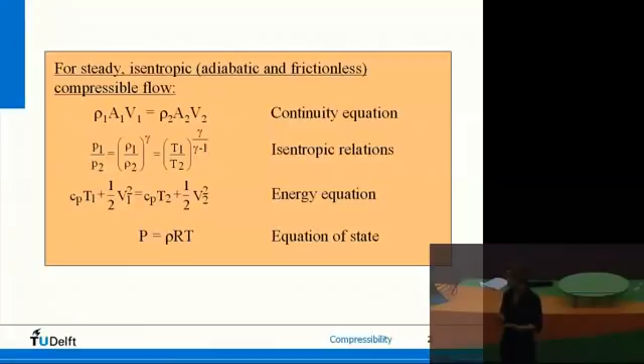Actually, if your flow is fast, supersonic or transonic, you have pressure and density changes such that the temperature does change in your flow. Through P equals rho RT, it can expand very much, so the density can drop a lot, and then something will happen to the temperature as well.

So please bear in mind, isentropic flow means that no heat is added or subtracted, but the temperature can still change. And the other thing is that it should be reversible so that dissipative effects can be neglected.

And then we derived these equations. We already had conservation of mass, the continuity equation. Then last time I derived the isentropic relations, and these are strong relations relating the scalar quantities, pressure, density, and temperature ratios to each other.

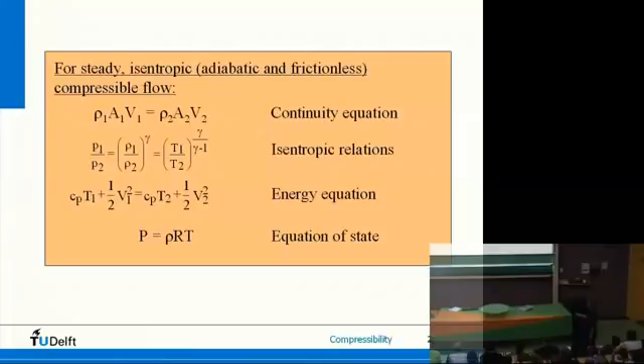So once you have knowledge about the state at point 1, and you know one other quantity at another location, point 2, you can derive the rest. These are the isentropic flow relations.

Then for isentropic flow as well, we could derive the energy equation, starting from the first law of thermodynamics and using the Euler equation. This is sort of the equivalent of Bernoulli. Here you see that velocities scale with enthalpy, so changes in velocity squared scale with Cp times T, which is enthalpy. This is conserved throughout the streamline, so Cp*T plus a half V squared is constant.

That's the energy conservation. We already had introduced in the first lecture the equation of state, P equals rho RT. So we have here the unknowns P, rho, T, and V — four unknowns and four equations. So if you know, for example, the areas, you can solve for anything from these. And that was where we ended up.

Last lecture, I was halfway through this exam problem from last year. It's a compressible flow problem. If you look at the old exams, typically for the aerodynamics part we have usually one question on incompressible flows, CL, CDs, and one question on compressible flows. I won't promise anything, but it will be quite a significant part because it's quite important for aircraft aerodynamics. It will be an important part of the exam.

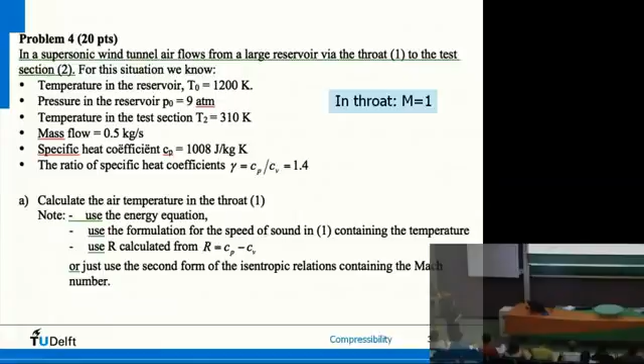So the exam question we asked last year concerned a supersonic wind tunnel blowing from a large reservoir into a converging nozzle. Reservoir conditions were given: temperature in the reservoir, pressure in the reservoir. Then the temperature in the test section was given, the mass flow, the specific heat coefficient, and the ratio of specific heats.

Then we finished part A, so we calculated the air temperature in the throat, and this is a picture of the case. We have a very large reservoir here, and flow is going out into the throat. I got a question, how can the speed be 0 in this large reservoir? Well, you can assume it to be really huge and the outlet to be very small. Some bit of the reservoir will have flow going out, but the very large bulk doesn't really notice it, so you can approximately assume the speed to be 0 inside the large reservoir.

It's going through the throat, a converging nozzle, then diverging into a test section. Now, if the conditions are such that you get really supersonic flow, and it was said it is a supersonic wind tunnel — that depends among other things on this contraction ratio, but also on the pressure behind it. Please note that the pressure in the reservoir was 9 atmospheres, so it's really pushed out.

If it's supersonic, then at the smallest cross-section, called the throat, we will have the Mach number equal to 1. The Mach number is speed divided by the speed of sound, so here the flow will exactly have the speed of sound. That has to do with something we will explain next year in compressible aerodynamics.

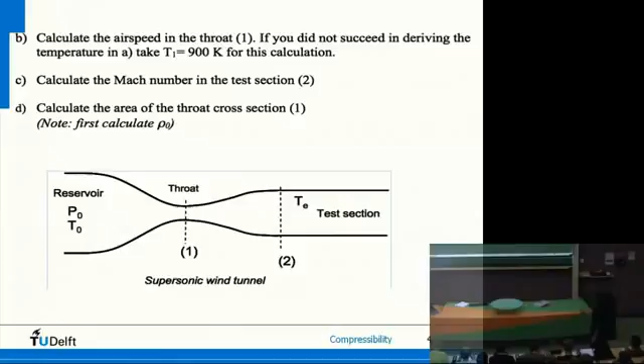So Mach is 1 here, sonic flow, and if it's a supersonic wind tunnel, if you increase the area, the flow speed will increase, and you will have supersonic flow at the test section. We're halfway, I think. We just calculated the airspeed, and I think we're now at point C. So I will give the answers we derived last time.

So the temperature in the test, what was it? In the throat, I think. What was the first question? Yeah, temperature in the throat. So, A: T star was 1000 Kelvin.

And B, the speed in the throat, actually equal to the speed of sound in the throat by definition, was equal to 640 meters per second.

Now let's continue with question C. And the question there is, calculate the Mach number in the test section. Mach number, any ideas how we can do that?

Yes. So step 1, what is the Mach number? Speed divided by the speed of sound. So Mach number in the test section is V test over A test.

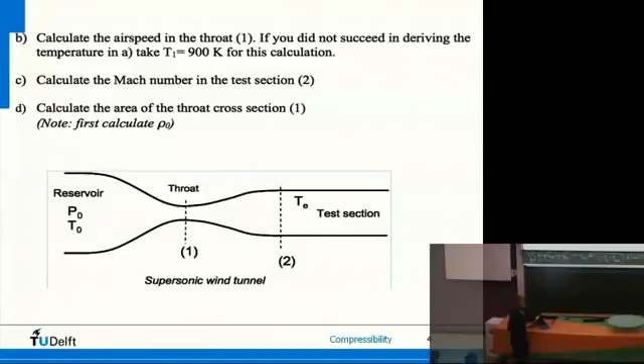The area of the throat of the cross section. Any ideas? Rho AV, we can use that one. And what is it equal to? Mass flow, perfect. So indeed, rho AV is constant. Good point, because this is the only equation we have the area in, so good starting point.

So this is constant, and what is it equal to? It's equal to the mass flow. You can check it: we have rho, kilograms per meters cubed, area in meters squared, V, speed in meters per second. So what is the dimension of this? It's kilograms per second. So how much kilograms of air go through this area per second?

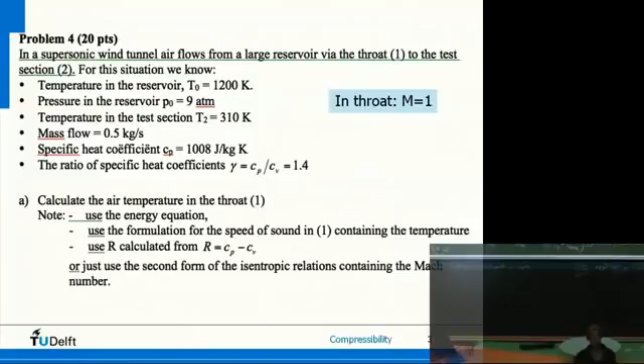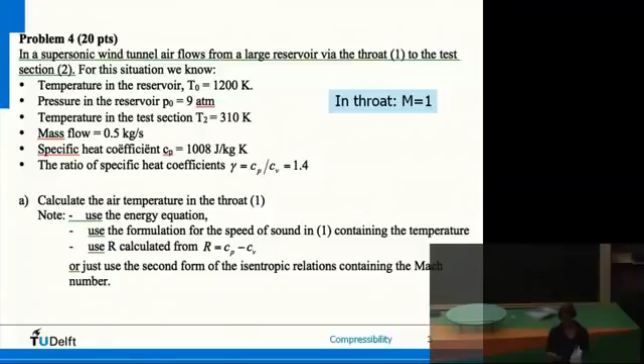Right, so it's the mass flow. Do we have information about the mass flow? 0.5. So indeed, we can solve this question now, because we have 0.5. Where do we have 0.5? Everywhere, it's constant. Okay, area of the throat in the cross-section, well then, of course, this one is given.

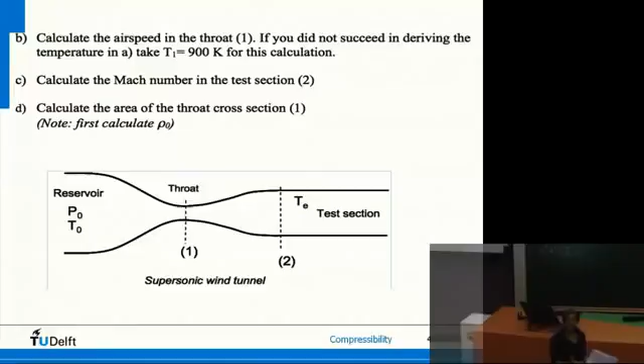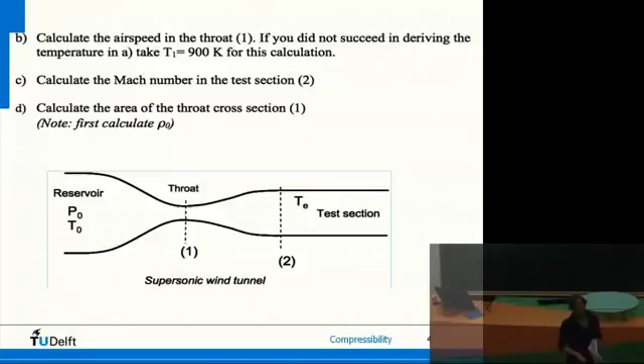Speed is 0? Whoa, wait a minute. So we have to apply this in the throat, right, to find the area of the throat. Then somebody said speed is 0 - wait a minute, I'll get back to that. So yes, you might get the idea that the speed is 0, because in the reservoir the speed is 0, we just assumed. So if you apply it there, we have no mass flow. What is happening there? Well, we have an infinite area in a way, so infinite times 0, what is it? It depends a bit on how it goes to 0. So that is not something that brings you much further.

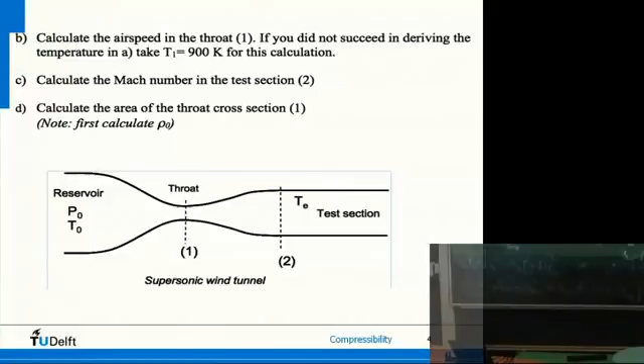So mass flow equals rho star, A star, V star. We're looking for A star, so that's going to be the area of the throat. It is then mass flow divided by density in the throat times speed in the throat. Do we have the density in the throat, and do we have the speed in the throat? Speed, yes, right, I think we computed it here. So that one we have from B. So V star from B, V star was 640 meters per second. So if there's any way to compute rho star, we're done.

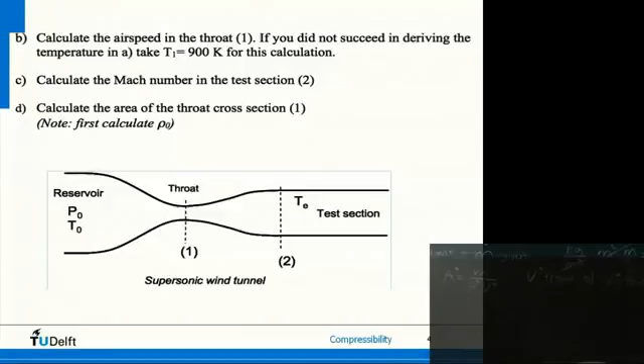Isentropic relations, perfect, because isentropic relations relate ratios of something to ratios. What would you apply it to? So of course on one side density, right? So the isentropic relations for density, rho 1 over rho 2 is equal to, and what would we choose, which form, pressures or temperatures? Temperatures, perfect, because we have more information on temperatures actually. So T1 over T2 to the power 1 over gamma minus 1.

Now we have to choose point 1 and point 2. So where are we going to take it from? This is the general form of the isentropic flow relations. We're looking for something in the throat, so it probably makes sense to choose one of them in the throat, right? So let's do this one in the throat. And the other one? 0, yes, reservoir.

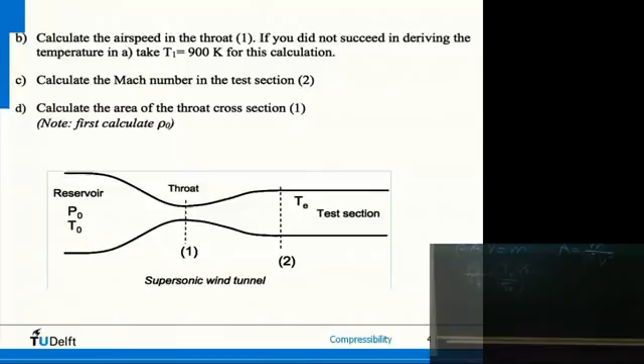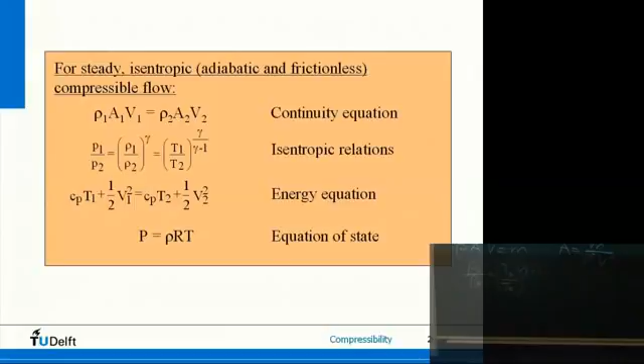Why do we choose the other one in the reservoir? No, this is fine, no, the gamma is with the pressures. Sorry, rho, I made a step. So rho 1 over rho 2 to the power gamma. So the isentropic relations: rho 1 over rho 2 to the power gamma is equal to T1 over T2 to the power gamma over gamma minus 1. What I did is I took the gamma square root of this. If I had taken the pressure, of course it's true, but I'm looking for density versus temperature.

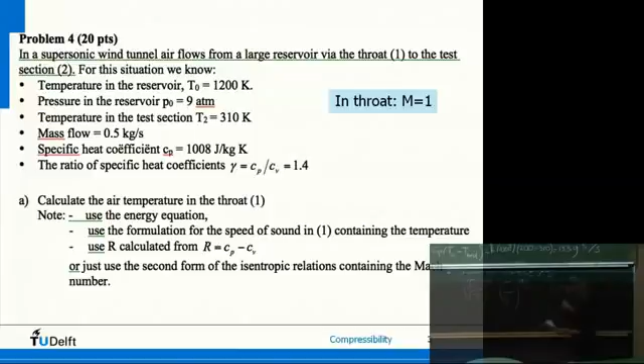Okay, why reservoir? We have also temperatures in the throat, right? We need pressure, because for rho 0, it's not enough to have temperatures. We use the equation of state, and we need pressure, and that's the only location that we know of pressure. Indeed, so rho 0 from the equation of state: P0 over R T0. So let's do that first. Then rho 0 is equal to the pressure, 9 atmosphere, so 9 times 1.01 times 10 to the power 5, divided by R, 288, times temperature in the reservoir, 1200. So then we find the density in the reservoir to be 2.64 kilograms per meters cubed.

So we know this one, rho 0, we know that one, and we know that one. Okay, so now it's just working our way through the equations. This means that rho star is equal to rho 0 divided by T0 over T star to the power 1 over gamma minus 1.

That's not so interesting, so rho star is rho 0, which we just computed, 2.64 divided by T0, which was given as 1200. T star we computed at some point, right? Yeah, 1000 Kelvin. So this is from A.

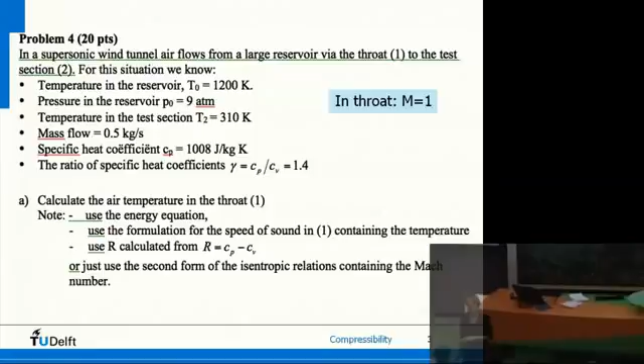Okay, compressible flows. A little bit more of compressible flows, and then we're going to look at measurement of flows, because that's quite important in our wind tunnels, but also when you're in your aircraft you would like to know the speed of your aircraft, and we do that in a certain way. So the rest of the lecture will first be a bit more compressible flows. I'll derive the second form of isentropic relations, but also how to measure flows. First, I'll clean the blackboard. That's section 4.9 to 4.14 of Anderson.

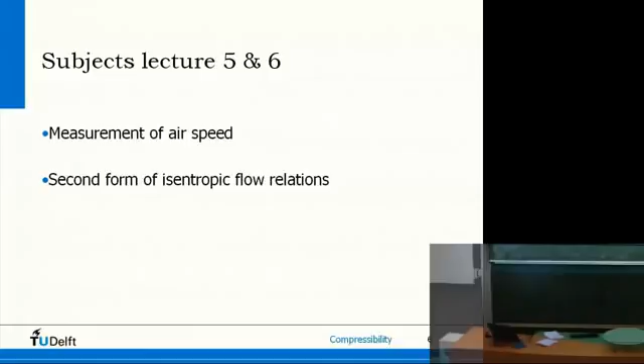So, measurement of airspeed and the second form of isentropic flow relations. Of course, compressible flows, unfortunately it's not flying anymore, but it's relevant for supersonic flows, like the supersonic aircraft Concorde.

Just summarizing from last time, also please don't forget about the speed of sound. That's the speed at which sound waves travel, A squared equals dp over d rho. Using the Euler equations and conservation of mass, we could derive that this is the same as A equals square root of gamma p over rho. Using the equation of state, we found A equals square root of gamma RT.

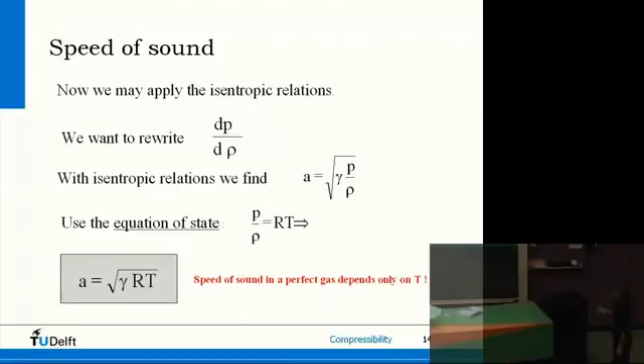So the speed of sound, which travels through a medium, is only related to the temperature. That's due to the fact that temperature is actually the kinetic energy of the molecules, and sound is transmitted through molecules throughout the medium. This is, of course, only in a perfect gas, because we use the equation of state in a perfect gas. Then the Mach number, V over A, we already worked with it.

Speed over speed of sound. If Mach number is smaller than 1, the speed is smaller than the speed of sound, and we call the flow subsonic. We actually have a name also for low speed subsonic: when the speed is so low you can assume incompressible flow, below 100 meters per second. But of course we also have high speed subsonic, above 100 meters per second, and this 100 meters per second is approximately Mach 0.3. So the low speed subsonic incompressible flow assumption applies when Mach is below 0.3.

But when Mach is between 0.3 and 1, you do have relevant density changes already, but the flow speed is still below the speed of sound, subsonic. Then when Mach is 1, they're exactly equal: sonic, what you have inside the throat of a supersonic nozzle, a wind tunnel, or also can be a rocket engine. If it's around one, we also have a certain name, that's called transonic.

So it says in some parts of the flow it's below 1, in some parts of the flow it's above 1, but it's actually around 1, and that is what most commercial airlines are flying at. So for transonic flow, if you have an aircraft at cruise speed, you typically have a speed of about Mach 0.7 to 0.8, and then the flow will increase over the wing, and you will have locally supersonic flows on certain portions of the wing.

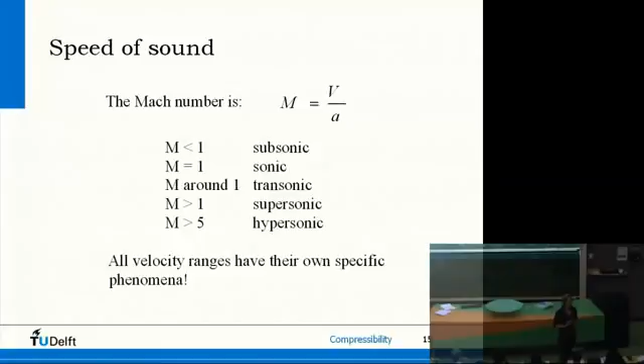Okay, now let's go back to the low speed range, the subsonic low speed, and look at how we can determine airspeeds, because that's what we're often very interested in—speeds of aircraft, airspeeds in our wind tunnel. So how do we go about that?

Suppose again a wind tunnel, but now a subsonic nozzle. So we have a converging-diverging nozzle again, a test section here, certain conditions upstream, certain conditions downstream, and certain total conditions in the reservoir way up here. What is then the value of this airspeed here in the wind tunnel section? So I have an example with that.

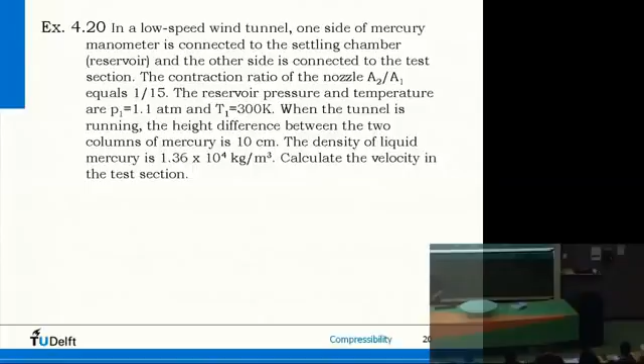That's example 4.20. So in a low-speed wind tunnel, we put a manometer, a mercury manometer, and connect it to the settling chamber, the reservoir, on one side, and the test section on the other side. The contraction ratio of the nozzle is given as 1/15, that's the area ratio. The reservoir pressure and temperature are given, and the height difference of mercury is given, where one side was connected to the settling chamber and the other side was connected to the test section. The density of the mercury is given. So the question: calculate the velocity in the test section.

So question 1 is, what does a manometer do? I hope you'll remember from high school, but if not, I'll repeat it. So let's first start with a manometer, which is a way to measure pressures.

A manometer is a U-like tube. We connect the sides through tubes to certain locations in the wind tunnel—one is the settling chamber and the other side is the test section.

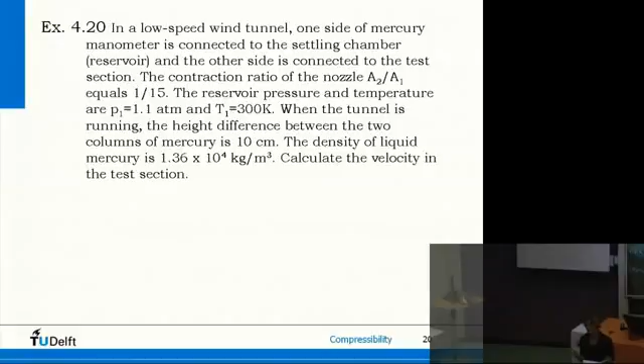Equation of state, perfectly. The pressure difference - if you think about the isentropic flow relations, P over P and T over T, that's really for compressible flow, where you have significant temperature changes. In incompressible flow, you typically don't have them. So the one I used before for the supersonic wind tunnel won't get you anywhere. But the equation of state, P equals rho RT - if we know somewhere pressure and temperature, we can find the density.

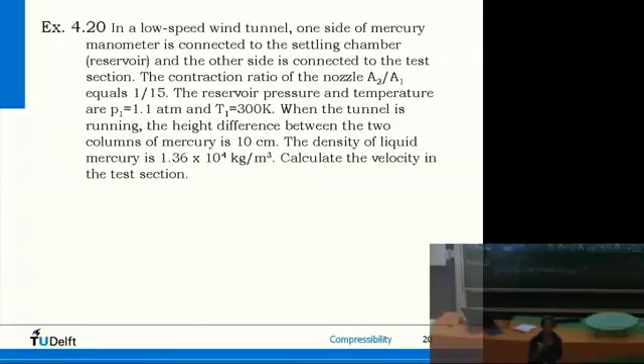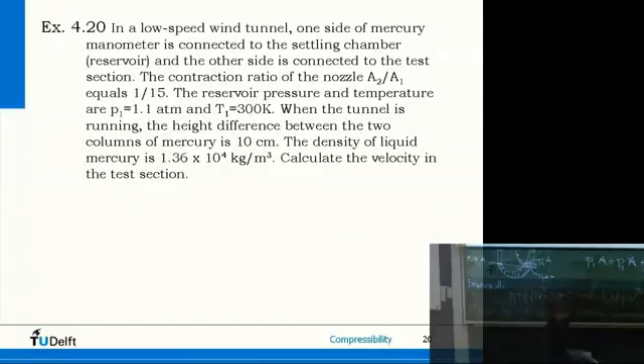Do we have somewhere pressure and temperature? Reservoir, or well, settling chamber, it's called here. Yeah, so rho from equation of state, that's the settling chamber. Okay, so rho we know. P1, PT, P2 we know through the manometer. So then we still have one equation with two unknowns, V1 and V2.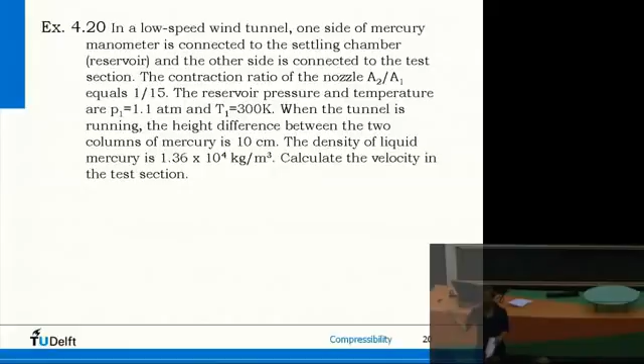So really, we have here a cross-section and here a cross-section. So we have a certain pressure here and a certain pressure here. And what you will see, we didn't compute it yet, but this pressure difference is not in the order of 9 atmospheres. It's much smaller in incompressible flow - small pressure differences scaling with velocity differences. So we still have a V1 and we have a V2. We're looking for V2 here, but we have still two unknowns, so we need more information.

Question: what didn't we use? Yeah, V1A1, mass conservation. We have it actually here - so if you're stuck, read the question again. Is there something given I didn't use? Yes, the contraction ratio. So conservation of mass, the continuity equation. And we have incompressible flow, so we have V1A1 is V2A2.

So we can substitute this into the equation. We're looking for V2, so we can substitute V1 is V2A2 over A1, right? So we can substitute that into this.

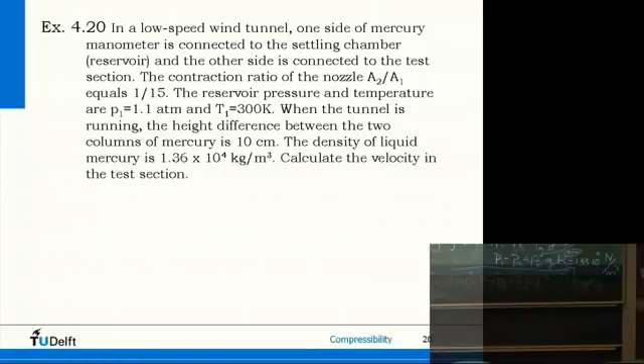So then we have the 1.33 times 10 to the power 4, that's the pressure difference, times 2, divided by the density - we didn't compute the density yet. So let's do the density from the equation of state: rho is P over RT. Pressure is given as 1.1 atmosphere, 1.1 times 10 to the power 5, R is 287, and the temperature is 300. So the density then is, where is it, here: 1.29 kilograms per meter cubed.

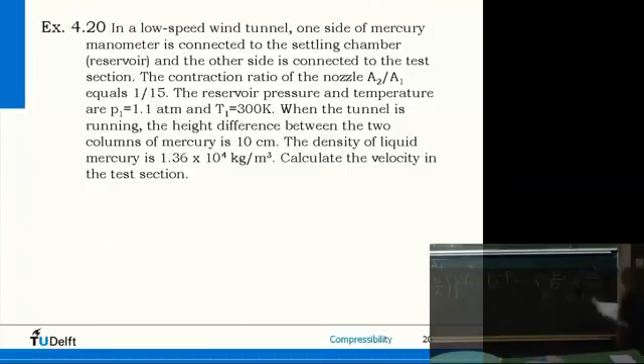And please don't mix up density - this is of course the density of the air going through. We use a different density in the manometer, that of mercury. So 1.29 for the density, 1 minus the contraction ratio, that was given as 1 over 15 squared, square root, and the end result...

144 meters per second. Somebody says, woo, compressible, yeah. So this is a bit of a nasty example. I won't do this in the exam because you cannot actually solve it - we didn't give you the information for the compressible flow - but it's good that you're aware, because I will show you later what difference it makes, quite often.

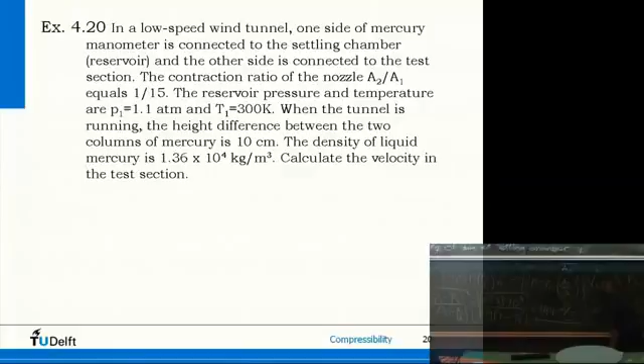But this - so the speed is above 100 meters per second, I should have used compressible flow. Later we'll look into the differences. It's not a very drastic difference - from the second form of the isentropic flow relations I'm going to derive later, you'll see it's not a strong difference, so it might change 7 or 8%. But I'll do that after.

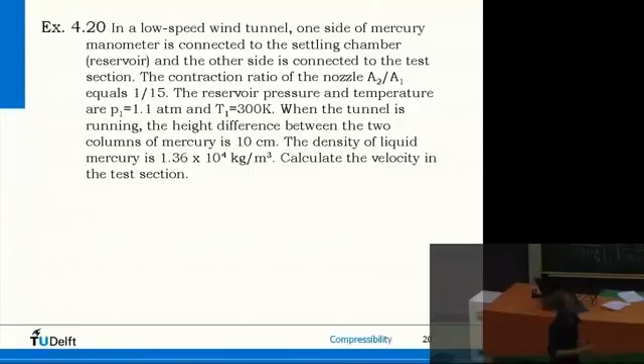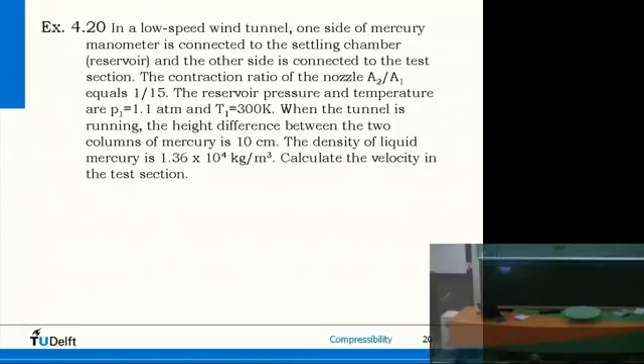I put the manometer on, right? And it's P1 minus P2, with a height. How did I know which one was the low pressure and which one was the high pressure? I think I said P1 minus P2 - or did I say P2 minus P1? P1 minus P2. So here was rho g h. Could I have said P2 minus P1? No, because you have to realize which one is the low pressure and which one is the high pressure - the one with incompressible flow, the one with the largest area, right?

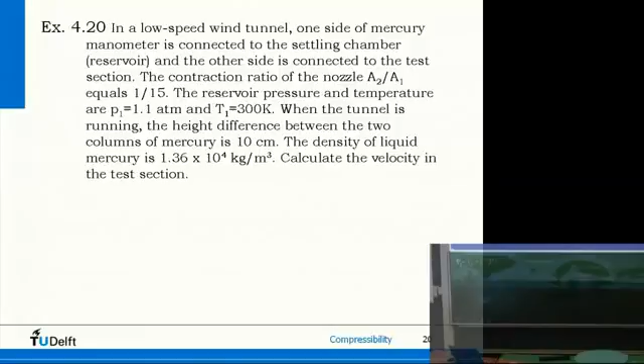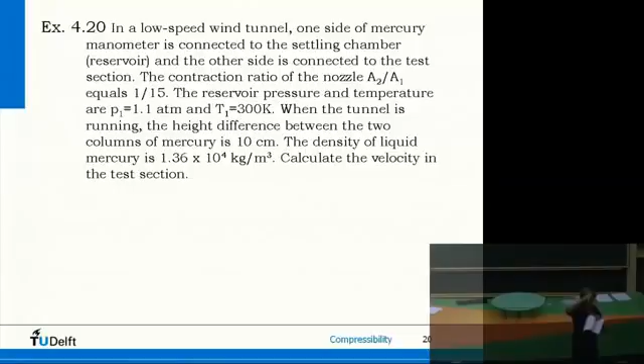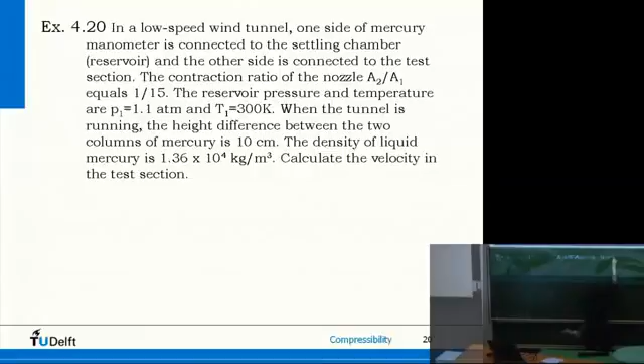So I use this: A2 over A1 is 1 over 15, so area 1 is 15 times larger than area 2. So area 1 is the large area, area 2 is the small area. So area 1, large area, low speed, and in incompressible flow, as we decrease the area, the speed increases, right? So area 1, large area, so what I used is A1 is 15 times A2, so V1 smaller than V2, and then in Bernoulli, P1 plus half rho V1 squared equals P2 plus half rho V2 squared. So if V2 is much larger than V1, P2 is much smaller than P1, right?

I drew this one, right? P1, P2.

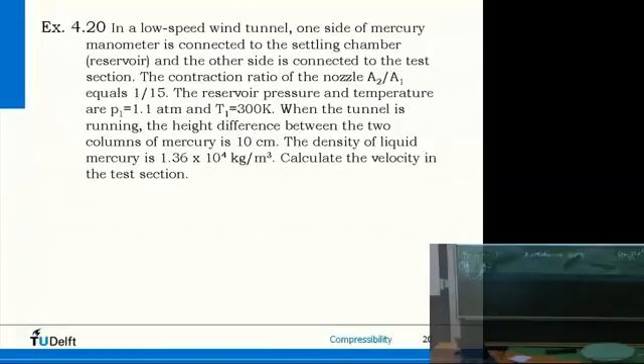So which one is the high pressure? P1 is the high pressure in this case, and P2 the low pressure. No, sorry, that's wrong, I'm confusing you. Well, whatever, sorry. But be aware that you get P1 and P2 correct. What you could also have done with the pressures is substitute them separately - compute P1 and P2 and substitute them into the Bernoulli equation. That's more confusing, sorry. Okay, then speeds. But at least you should be aware which one has a higher speed and which has a higher pressure and lower pressure.

Of course, the notation is a bit confusing. I introduced speed as a vector with a direction. Here, I always do a one-dimensional balance, so my velocities have just one direction, typically horizontal. I don't assume changes across the cross-section, so I have a cross-section and assume unidirectional, uniform flow. Viscous effects are not important, and that is my speed. So it's not really a vector because I use scalars - I really only use the x direction.

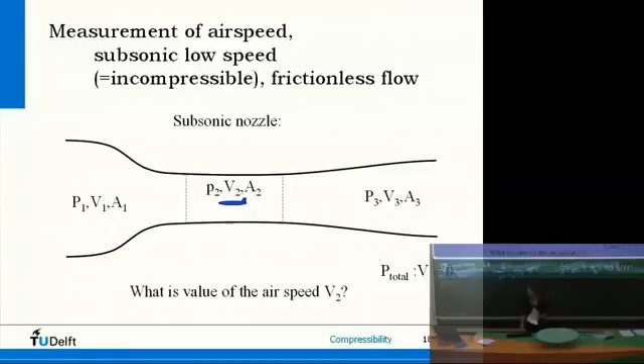Then I ask you a homework - I gave you homework which you can now maybe solve. So given this example, homework 4.4, please have a look at it. It was also a converging-diverging nozzle with V in and a pressure given. A contraction ratio is given there, and P1 minus P2 is given here. It's in Anglo-Saxon units - you can transform it to SI units if you want, but it's more about the way you think. So I don't mind what the answer is, but think about whether you can solve this. The question is to find V2 given only this. Some people were not able to solve it, but you can solve it a similar way as this example, so please try that at home. Okay.

Then we go to equivalent airspeed, and I'll introduce that to you based on another example. How is airspeed usually measured on an aircraft? Using pitot tubes and pitot static tubes. Here we have some information: an altimeter says the aircraft is flying at 1500 meters, we have an outside temperature of 277 Kelvin. If a pitot tube mounted on the wingtip measures a certain pressure, what is the true velocity of the airspeed, and what is the equivalent velocity of the airspeed? Now I'll introduce those concepts.

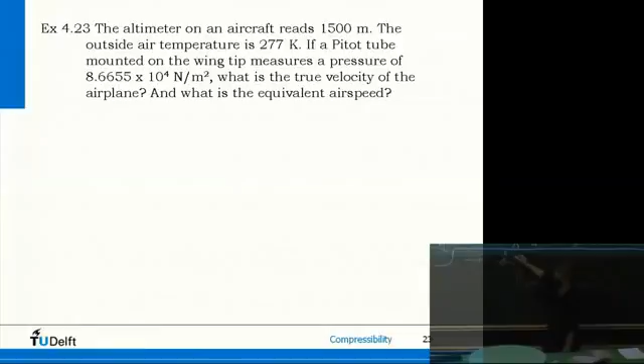So first the pitot tube - that's a way to measure. We had the manometer measuring pressure differences; the pitot tube also measures pressures. The pitot tube is like this: you have the flow, this is actually a very small tube. Flow flows into the tube and you have here a pressure gauge, sort of reservoir, where the speed is collected. So the speed goes in, and then the tube fills itself with air. So what is the pressure that you measure here? Stagnation pressure, indeed, because it fills itself and then it doesn't flow through. So actually, if you put this tube into the flow, the pitot tube measures the stagnation pressure, or total pressure, there where the speed is zero.

We also have pitot static tubes, connecting this one to another with typically a manometer. So suppose you have a channel - you connect this, again, a differential pressure gauge, to this tube. In this way you can measure differences: here you measure total pressure, and here static pressure. Why does it measure static pressure here? Well, this tube doesn't fill up - the flow goes just past it, and inside the pitot tube the pressure is felt locally at that point. So you have the static pressure and the total pressure, and here a differential pressure gauge that measures the difference. So you have information on P0 minus P static at that location.

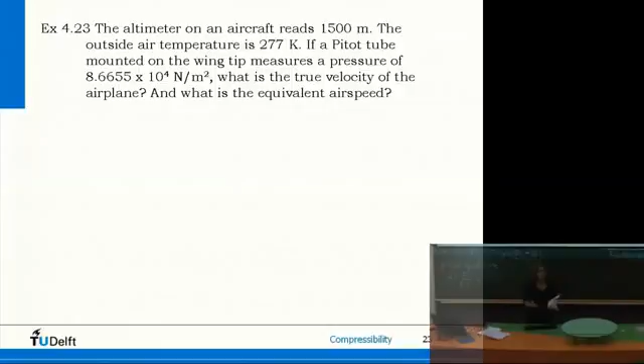So then, what pressure do we use, right? The strange thing is that the density we assume constant, the pressure changes a bit, so apparently the temperature also changes a bit, but we don't have information on how the temperature changes that bit, right? So what do we do? We have information on pressures at free stream conditions, so we use the temperature at free stream conditions. So we need the free stream pressure, P, at 1500 meters, at free stream conditions.

8.456 times 10 to the power 4, divided by R 287, temperature given 277. So then we find the density to be 1.064 kilograms per meter cubed.

So now we can compute the velocity, square root of 2 times P0 minus P over rho. So V is 2 times P0, the pitot tube value given up there, 8.6655, minus this one, 8.456 times 10 to the power 4, divided by the density, 1.064, square root. And then we find the speed to be 62.8 meters per second. Is that okay?

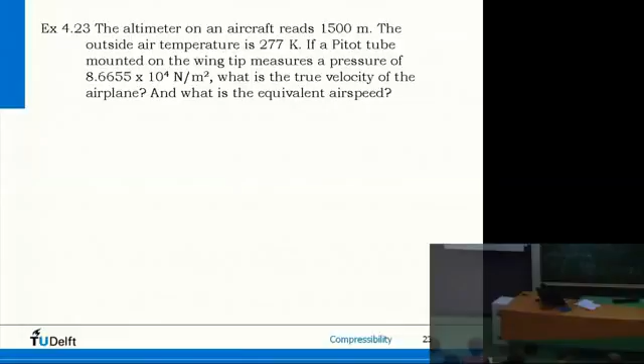The pitot tube just measures the static pressure or the difference between them both? No, so question of the definitions, good point. Pitot tube always measures total pressure. So pitot tube is this one, total pressure. This is the pitot-static tube, so this one is called pitot/static tube. So the pitot tube measures total pressure.

Now the equivalent airspeed, so we just computed the true airspeed. Equivalent airspeed is, if people are lazy, they sometimes use it in aircraft and use not the actual density from the temperature measurement, but the density at standard sea level conditions, so 1.225. So it's an approximation. Now how far off are we? So we could have computed the equivalent airspeed.

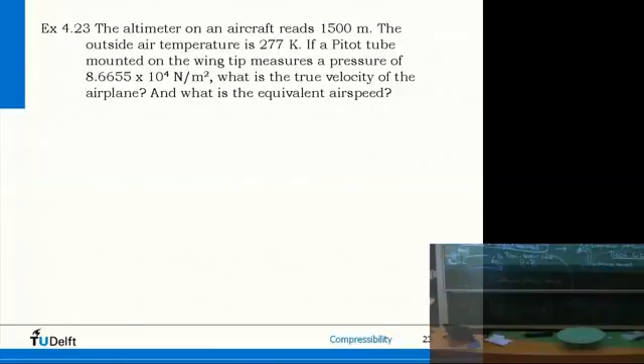So that's equivalent airspeed. Questions? No, then we can continue with our compressible flow stuff.

Yes, question, sorry. Why do we actually use equivalent airspeed? Yeah, because it's in the Anderson book and it is a good concept. I don't think you use it that much. The question was, why do you use equivalent airspeed? Well, it's hard to measure densities, but you can derive densities from temperature. So if you have an actual temperature measurement, it's not a problem like this. But sometimes people don't have it, and then they use it as an approximation. But especially close to stall, I wouldn't recommend it.

Okay. Yes, isentropic flow relations. So bear with me for the last quarter of an hour.

Okay, so what are we going to do?

We have the compressible flow equations: the energy equation relating temperatures and speeds, and isentropic flow relations relating density ratios to pressure ratios and temperature ratios. But sometimes it's easier to work with things like the Mach number, so you can recombine these equations into a different form. They're not more information, just in a different form, which might be handy if you have information about Mach numbers. So instead of temperatures, velocities, pressure ratios and density ratios, we'll combine them so that if I have information on a temperature ratio and a Mach number, I can directly relate ratios to Mach numbers. So that's what we're going to do, recombine the energy equation and the isentropic relations.

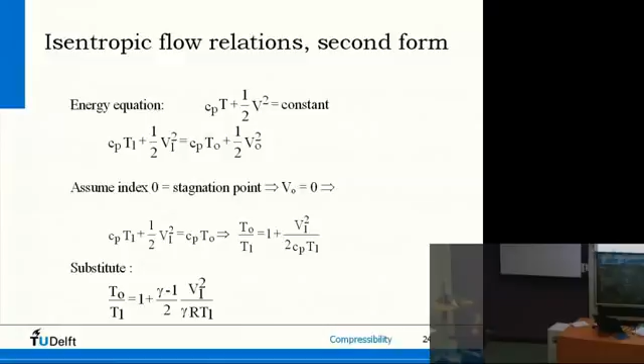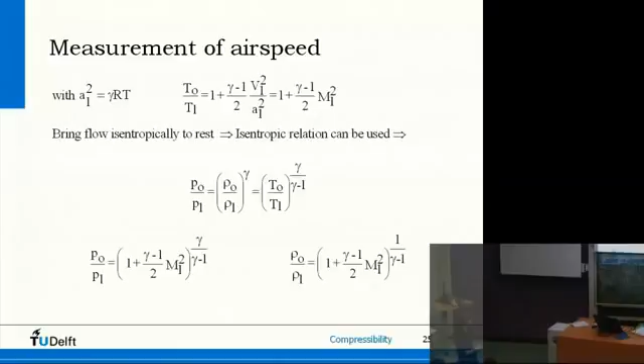So then we have these and these from the isentropic flow relations. I think I have a summary slide. Yes, it's the same - it's gray, so it means that you really have to remember it. On the exam, we might ask you to derive these from the energy equation and the isentropic flow. The only a bit tedious step - it's actually quite straightforward, I think.

The only tedious step is these specific constants reworking I did on the blackboard. But if you remember that you have to start from the energy H is E plus PV, and you have to work your way to find a relation for Cp as a function of R, I think you should be fine. Should be - if you practice lots.

Okay. I hope we have time for one practice. No? Oh, sorry. Okay, now what am I going to do first?

So I told you, you had to believe me, that we can assume incompressible flow for low speeds. You believe me? Good, I've been convincing. You can check now, right? So here you have a relation of how much the density changes with respect to total conditions as a function of the Mach number, and it goes squared.

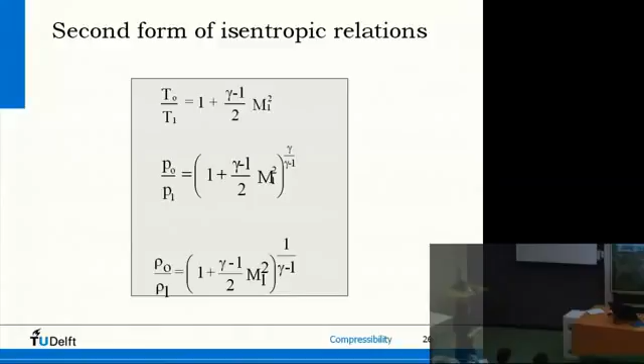So you can imagine squared, that is a parabola, right? So close to 0, it will not change that much. I will have the plot on the next slide. Close to 0, it will not change much, but further away, for higher Mach numbers not close to 0, you have a stronger density change. So from this equation, I can directly show you what this density change actually is.

Here I have the density ratio, so now I have to put it the other way around: rho over rho0, so it is going down. So when the density becomes smaller than my total conditions - here I have Mach number. At 0 Mach number, my density is my total density. Up to Mach number of 0.3, the density - of course this incompressible flow assumption was an assumption and an approximation. In reality the density changes, but it doesn't change more than 5% up to Mach 0.3.

We neglect this couple of percent, but here you can treat the flow as incompressible. So around below Mach 0.3, so around below 100 meters per second. But if you apply it at 110 or 115 meters per second, it will not harm you. If your Mach number is really 0.7, you have a problem, because at 0.7 the density drop is 20%. And this of course is taken into account in the velocities and the pressures.

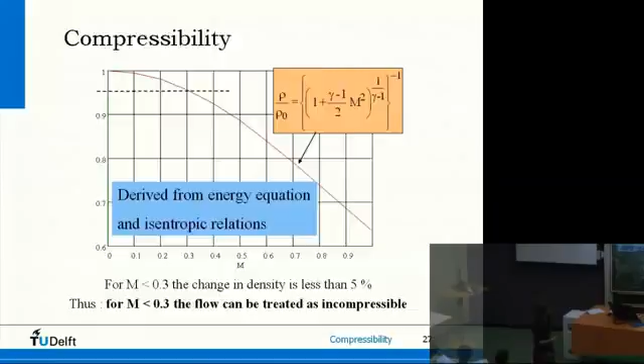I will not make that. No. Okay, well I think I'll finish and then next time I'll start with 435. Any questions? Yeah. Okay.